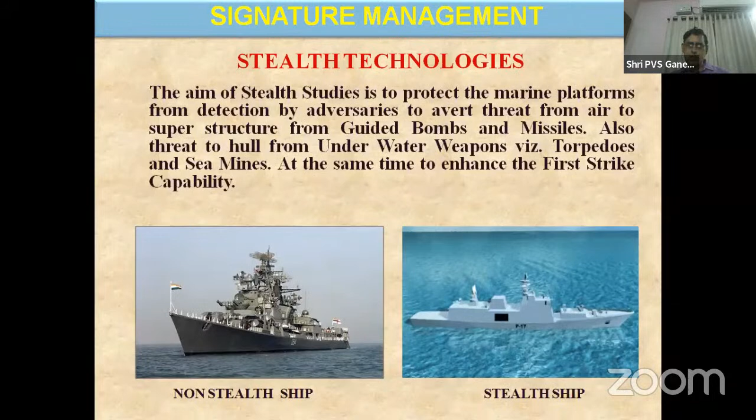In general, when we say stealth technology, we are saying a military tactic, trying to conceal our presence from the enemy. How do we do that? By what is known as signature management. In other words, whoever is able to have the first look will be able to have the first shot, and therefore will be able to have the first kill. That is the principle on which signature management works. If you're able to manage signature very well for ships and submarines, you will be able to do the first look, first shot, and first kill, and that is the aim of the entire signature management.

Here I put two words, Trojan horse and chameleon. Many of you have heard about the Trojan horse, an example from the Trojan War, where the Greeks built a big Trojan horse in which soldiers were hidden inside, and they kept the Trojan horse outside the Troy fort. Troy thought the Greeks had left the fort, celebrated as if they got victory, and took the Trojan horse inside their city. Suddenly from the Trojan horse, in the night, the Greek soldiers came out and invaded the complete city. This is an example of how stealth can function. It's basically a stealthy operation where soldiers were concealed inside a horse and deceived the Troys in the war.

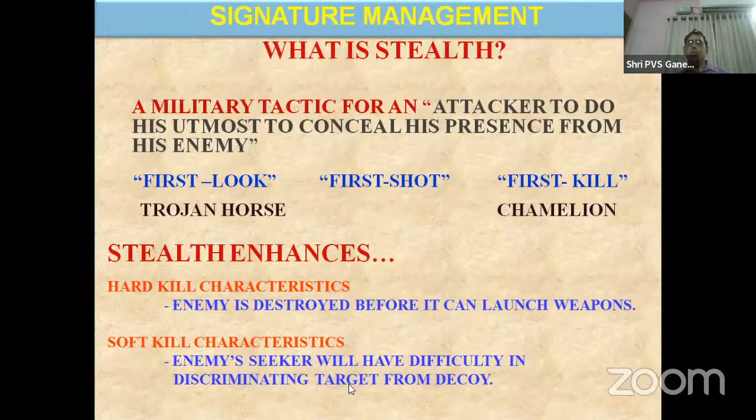Having heard the general philosophy of what stealth is, we look at the spectrum of signatures which we have to control for a typical naval platform like a ship. Here you can see there are multiple signatures that we have to manage.

For example, you are talking of infrared signature, radar cross section, laser cross section, acoustic airborne noise, underwater noise, magnetics, underwater electric potential or extremely low frequency emissions, and hydrodynamic wake. These are the various signatures which we have to conceal or manage so that when emitted from the platform, they are not visible or sensed by the sensors of enemy weapons, targets, or vessels.

Now coming to this particular topic today, though I have shown a lot of spectrum, if I go back you can see the previous one again. You can see a lot of spectra here, a lot of signatures here.

Out of all these signatures, as Admiral Shrivastava mentioned, acoustics is one area where a lot of emphasis is now made, that we should suppress the noise and vibration of the platform to ensure that sonars and mines do not detect our platform. It's a very critical signature, and therefore this gets a lot of importance.

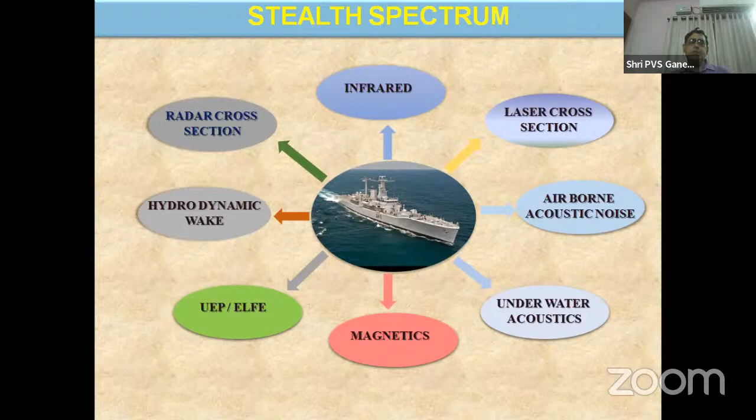How do you manage this? It depends on a lot of techniques that we have to develop. That is the focus of this particular lecture today. So in general, we are talking more about how to control the vibration noise in a marine platform.

When we are talking of noise and vibration to be controlled, we have a concept called source path receiver concept. This is the starting point in noise control. Source is basically, for example, an engine on a ship. It generates vibration, transmits the vibration through its surrounding structure, and then through the hull it transmits as noise in the sea.

So therefore, the source here we can say is typically a diesel engine or a gas turbine or any such auxiliary engines etc. So many engines on board the ship become a source of vibration and noise.

Similarly, a propeller is a source, because when it churns it generates a lot of both vibration as well as noise. In a similar way, there is another source called flow. When the ship moves in water, all around the ship you have turbulence generated due to the movement, and that generates what is known as turbulent boundary layer noise. This flow noise also can be sensed by the sensors from a distance, therefore it is one of the components.

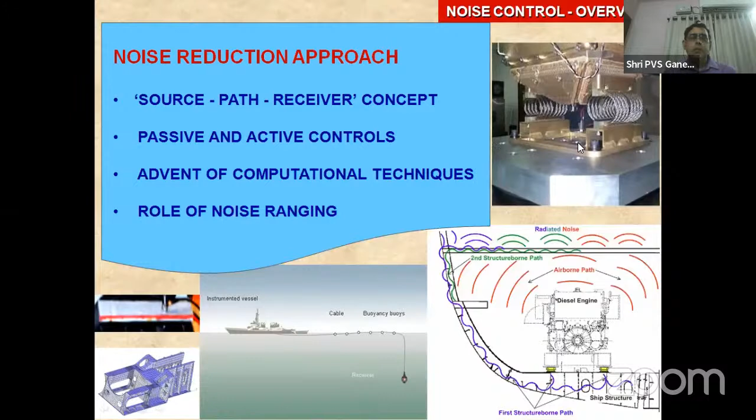These are various ship quieting technologies which are basically implemented practically in many installations. Though it's not an exhaustive list, it's more of a representative list of various techniques available to reduce vibration noise on board marine platforms. Some are internal to hull, some are external to hull.

Internal to hull, as I said initially, suppressing noise at the source level is the ideal thing, which is why low noise machinery is always the priority. If we are not able to do low noise machinery, we come to other aspects like applied damping, for example constrained layer damping or what is known as free layer damping, and vibration isolation systems. Nowadays we are using even two-stage mounting systems and raft mountings, which are more advanced than the single-stage vibration isolation conventionally used.

We also have structural modifications that are possible, like a foundation can be modified to create more impedance mismatch, and typically material changes also. For example, instead of metal, if you use composites, the damping is much better in some applications. We have adopted this as well.

We have flexible bellows and compensators for piping, silencers and mufflers for intakes and exhausts of various engines, whether turbines or diesel engines, and acoustic enclosures, hoods and barriers to suppress airborne noise. We also have detuners, which suppress tonal vibrations or tonal noise components. Various forms of detuners are available, for example tuned mass dampers or tuned viscous dampers, and so on.

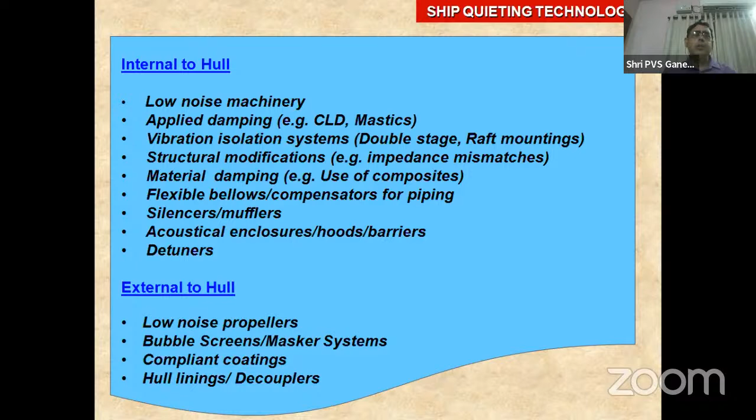Now coming to the next slide, as I mentioned in the beginning, any signature management effort, if it is retrospective, is not going to be the best. Definitely it will be ideal if you are able to implement this at the design stage itself. So it is that much more important that signature management should be an integral part of the overall design spiral.

Coming to only the acoustic design spiral, I call this the acoustic design spiral, where from the conceptual design stage of the platform, you start with your own prediction model of the acoustic or noise model, and then compare with noise limiting curves.

If you are satisfied, you go ahead to the preliminary design level, and then again estimate the noise levels. Probably at this stage you may need to do some model experiments to correlate with your estimations, then analyze and evaluate those data from estimations and model experiments. If required, you modify and refine the design and complete your preliminary design for the acoustic part.

Then you go to the detailed design part, where you need to identify what are the quieter technologies, like I listed some of the quieter technologies in the previous slide. What quieter technologies need to be implemented in the current design platform can be decided at the detailed design stage, because by the preliminary design stage you know where you are with respect to noise, and where the possible lacuna or deficiency is.

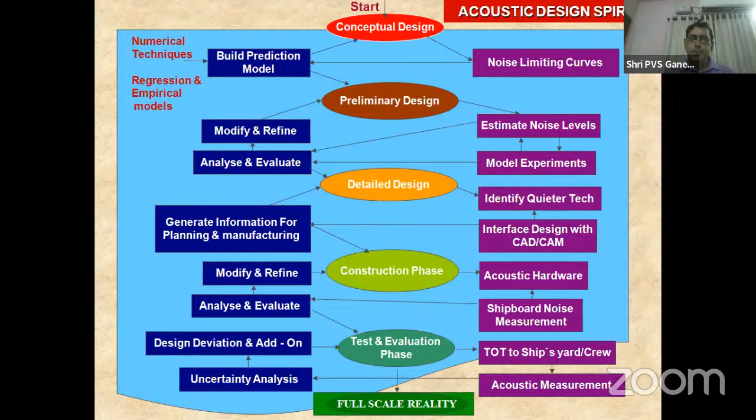Now coming to various kinds of technologies or systems possible to implement in vibration noise control, we have vibration isolation systems, as I already mentioned, which are basically rubber isolators or spring isolators. Various forms of isolators are possible, and they give a lot of improved vibration isolation from the engine to the hull. It reduces the vibration, and naturally lowers the radiated noise signature.

Various forms of isolation are possible. You call it two-stage mounting systems today, because instead of a single-stage vibration isolator, you put two stages of isolators with an intermediate mass - we call it two-stage isolation systems. Similarly, we have raft mounting systems and things like that. I'll come to that in detail in the next slide.

Surface damping treatment is another approach where you can have different kinds of damping applied to the hull and structures. This reduces vibration transmission, particularly in resonance zones, and there are various treatments developed - for example, free layer damping treatment and constrained layer damping treatment. Similarly, for airborne noise reduction, we have acoustic enclosures, hoods, silencers and so on, which reduce airborne excitations and improve habitability on board the ship.

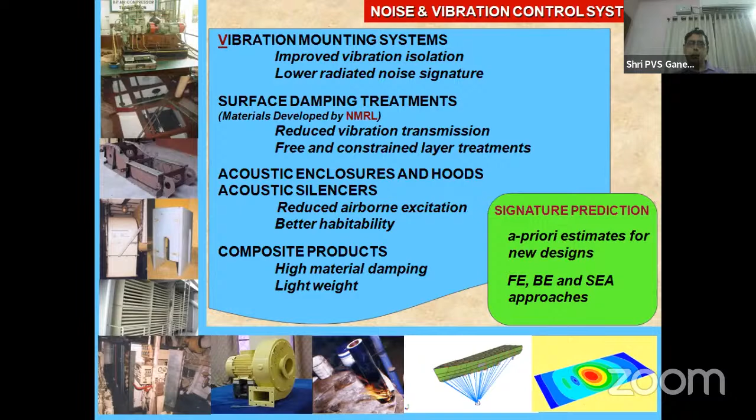So I'll just go through some of what we call vibration isolation controls and noise control systems, which are typically used in the contemporary stealth platforms.

For example, two-stage mounting system is one of the very popular approaches used to reduce vibration to a high level of dB reduction. If you are getting say 15 dB reduction with a single stage vibration isolation, you will be able to achieve almost 25 to 30 dB reduction with the help of a two-stage vibration system. It is not just because of doubling the isolation; it is about the way it is designed. You can see here there are two stages of vibration isolators - one isolator here, another isolator here, and an intermediate structure which is a metallic structure. So this intermediate mass also plays a very critical role, other than the two stages of isolators, in determining the overall performance of the two-stage vibration isolation system.

In addition, because it is increasing the height of the installation, we need to take care of the roll and pitch, and therefore there are some things called limiters which are placed on both sides to ensure that it doesn't sway too much because of the increased height. So we call it as limiters.

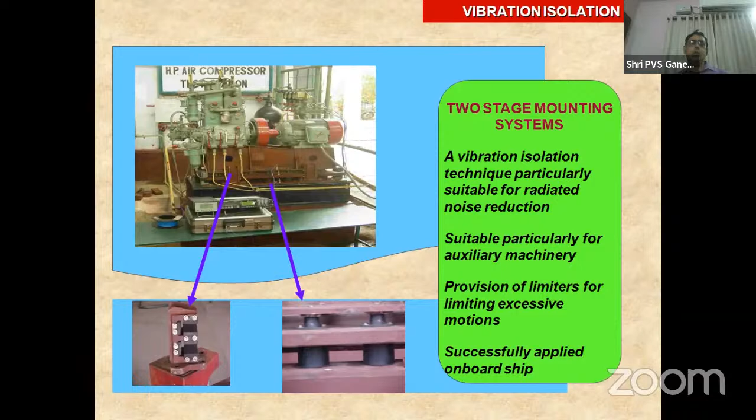These have actually already been tried and successfully applied by us on board ship, and it is being adopted now in almost all newer platforms, all new design platforms.

Similar is the case with the constrained layer and free layer damping treatments, another approach where you can reduce the vibrations by adding what is known as viscoelastic material. The viscoelastic material typically used is various types of rubbers, whether it is butyl rubber or neoprene or nitrile rubber and so on. Various kinds of rubbers are available based on the environmental requirements as well as the performance. We have to choose appropriate materials.

NMRL being our own sister lab, we take a lot of help from them in choosing the appropriate composition and identifying the material. Then we test them at the laboratory using our own methods, in say floating barge or a foundation structure. For example, this is a foundation structure, and this is a floating barge in which we applied say a typical mastic treatment and tested for vibration noise.

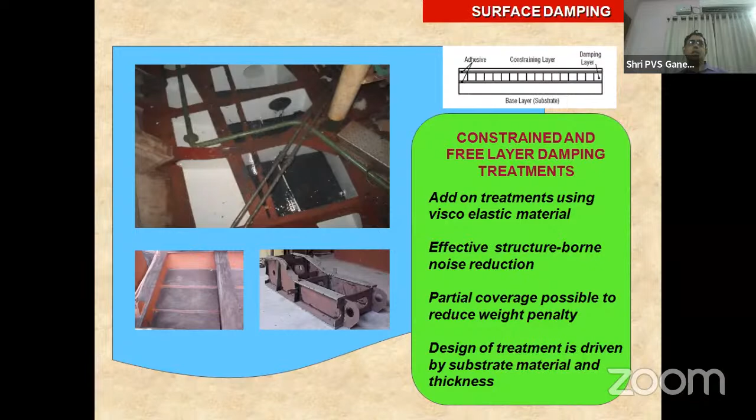So there are various viscoelastic materials tried, and we came out with various compositions, and even partial coverage is possible to reduce the weight penalty while ensuring we get the vibration isolation to the level of satisfaction. This is another successful technique being implemented in various installations on board marine platforms for vibration noise reduction.

Here is another example of what is known as airborne noise reduction method - an acoustic enclosure or hood, wherein you enclose the complete engine with what is known as barriers. The barrier materials are made of perforated panels, with one solid panel outside and a perforated panel inside, and in between it is filled with the sound absorbing material.

The sound absorbing material could be a kind of glass wool, could be mineral wool or rock wool and so on. There are various types of materials we have evaluated and found different, based on the requirement of performance for different frequencies - we can tune the kind of material accordingly to make a panel out of that.

These panels can be assembled to make what is known as an acoustic enclosure. Similarly, for smaller equipment, we call it an acoustic hood. You can see one here - this is a typical acoustic hood for one of the pumps, whereas this is a complete enclosure for a diesel alternator.

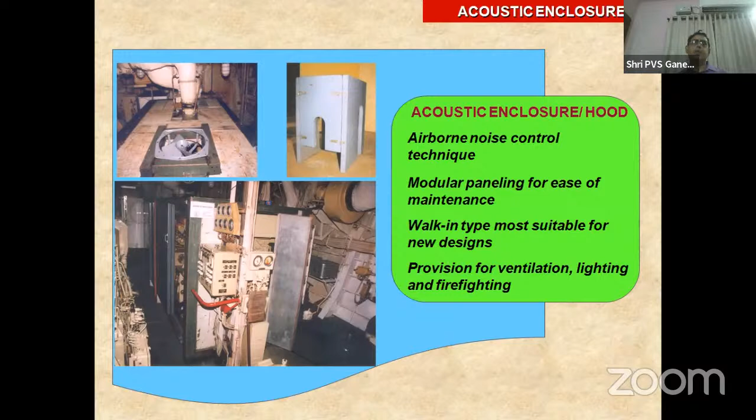Typically we can design all of them at a very early design stage of the engine room itself, so that the space constraint with respect to applications will not be a problem in actual implementation. In newer designs, we are creating enough space at the design stage so that these enclosures and hoods can be catered for. For example, a walk-in type design enclosure is a very important design for a gas turbine, and these are already being implemented.

Another application for airborne noise reduction is the silencer. Here we call it a dissipative silencer, because various types of silencers are available in the literature, whether reactive silencers or dissipative silencers and so on. Typically what you see in automotives is a reactive silencer, which depends more on geometric changes in the construction. Whereas in a dissipative silencer, we look at the principle known as baffled silencing.

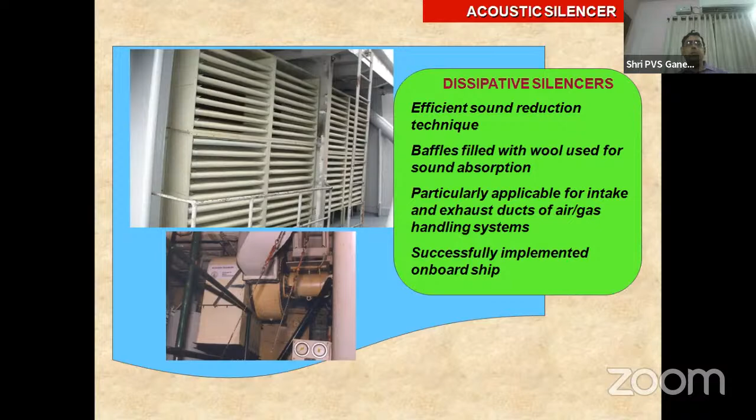Baffles are panels filled with wool, and these baffles are made of a casing material, typically GI material, galvanized iron. In case you don't want any maintenance issues, you can even use FRP composites for the casings, and then fill it up with the typical wool. The thickness of the baffles has to be designed so that we get efficiency in terms of sound reduction. At the same time, it should allow the mass flow required for intake or exhaust. These are successfully implemented and used in all ships and various marine platforms.

Another point is about composites for vibration noise reduction, where you use fiber reinforced plastic for control of vibration and noise. Here you can see some examples - one typical foundation structure or a blower casing is fully made of FRP, or even a pipe. Composite pipes are made and used onboard some ships - one of the ships we have actually implemented this.

Similarly, even a complete shafting can be made of composite shaft. These are some typical examples where the inherent properties of composites, primarily the damping property, can be made use of in reducing vibrations and noise on a typical marine platform. Therefore there are various possible applications for this, and some we could practically demonstrate.

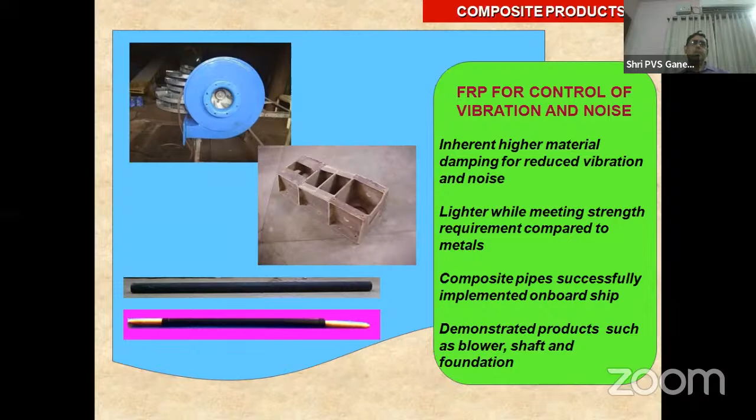For prediction, as I mentioned, FEA, BEA, and SEA - finite element, boundary element, or statistical energy analysis - combined with CFD will really provide excellent tools for noise prediction today. There are even commercially off-the-shelf software now available to predict the noise. They are very suitable at the design stage itself, so you can play with the parameters to check the ideal way of treating the platform for reducing underwater noise.

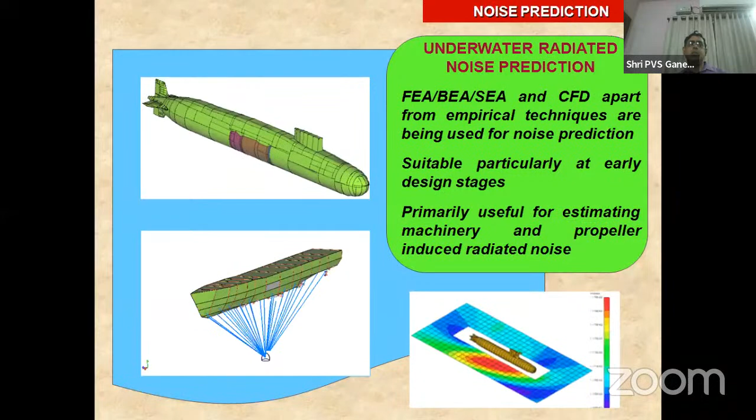Therefore it is being used now in our newer designs always. This is typically some of the plots showing how a complete submarine or ship can be modeled, and noise can be estimated for the complete platform.

There is another important technique coming up for measurement or vulnerability assessment - acoustic vulnerability assessment - the acoustic holography technique, which is very important today to assess the vulnerability of a platform from a noise point of view. Even an engine can be assessed for its noise pattern. The advantage here is you can get a 3D image of the complete noise pattern of whatever object you are measuring, so it becomes much easier to identify the hotspot and effectively control the source of noise. This is becoming a very critical technique now.

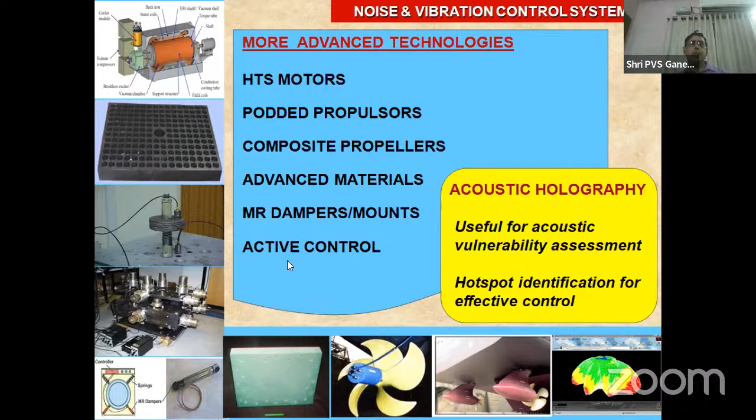Coming quickly on to the various topics that I listed just in the previous slide.

The advantage with this kind of propulsion, the HTS motor, is a big reduction in noise signature. At the same time, the size will be much smaller compared to conventional motors, and electrical performance is extremely fantastic, almost 98% as the literature says. You can see the relative sizes here. Conventionally, say 36.5 megawatt is typically like this, but for the same thing it will become almost one-fourth in an HTS motor. So this is a big attraction: the size, the lower noise, weight reduction, the inherently quieter machine with high efficiency. All kinds of advantages that it offers are really the major attraction.

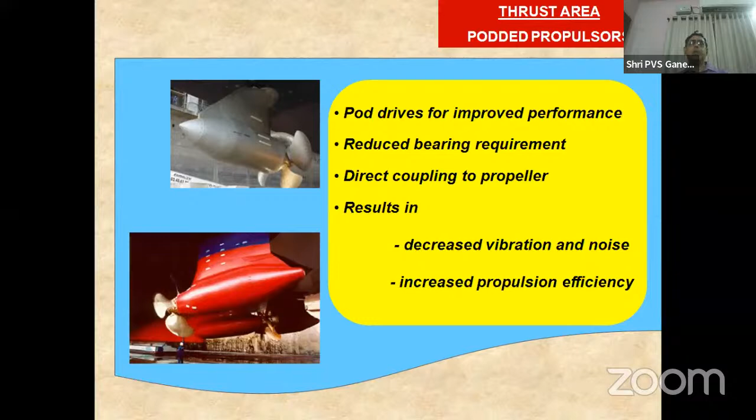Coming to composite propellers, they are realizable, and we have already done this for some of our applications. They offer increased damping, at the same time lesser weight penalty. Obviously maintenance is much easier because there is no corrosion. They are improved, shock and fatigue resistant, and are well proven now.

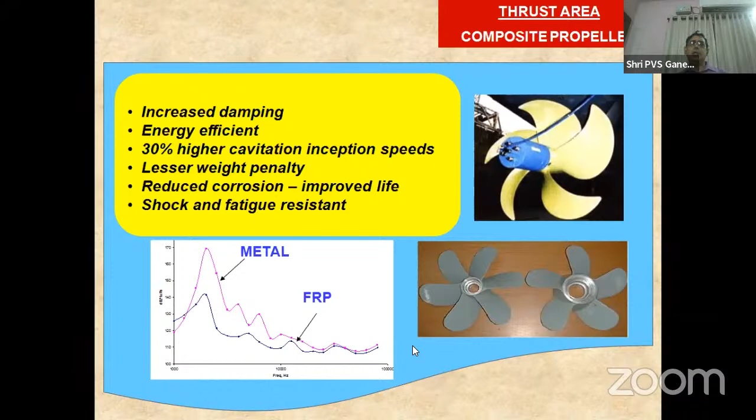You see the typical metal versus FRP noise level curves here. FRP shows much lower noise level, particularly from medium to high frequencies. These are two typical composite propellers realized in our laboratory for a typical application.

And there are other materials, as I said, honeycomb sandwich panels, which are also being tried by various laboratories, because these are now going to be used for hull construction also in future, and they are going to be highly noise reducing structures.

Tiles I already talked of, like anechoic tiles and decoupling tiles, which are already being done by NMRL for various applications, including submarines. But ideally I would like to have anechoic and decoupling tiles together in one tile, known as a magic tile, a combination tile, where you try to meet the requirement of reduction of noise from the platform, while also trying to reduce the echo coming from the outside sonar. If you are able to achieve both objectives in one tile, that would be a wonderful tile. This is where we are now trying to lead NMRL to develop. Individually, both kinds of tiles are already developed and proven, so we are looking forward to the magic tile for the future. They reduce self noise and also help in reducing the radiated noise signature.

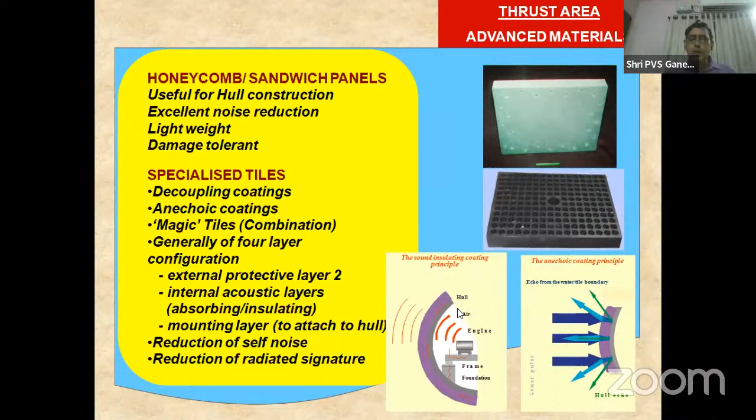I already talked of tuned mass dampers. Though it is realized to some extent, further work is required because we have to optimize the way it is being developed. Detuners can be one of the approaches, a tuned mass damper. The idea is to reduce the tonal vibration coming from any particular engine, pump, or auxiliary equipment. If any particular equipment is giving a typical single frequency tone as a dominant tone, then ideally this kind of tuned mass damper or tuned viscous damper can help in reducing the tonal vibration.

You can see the typical reduction that you get. Without the TMD, you got this much peak, whereas when it is implemented, it has almost become flat. So this is a very, very effective tool or technique for reducing the tonal vibrations.

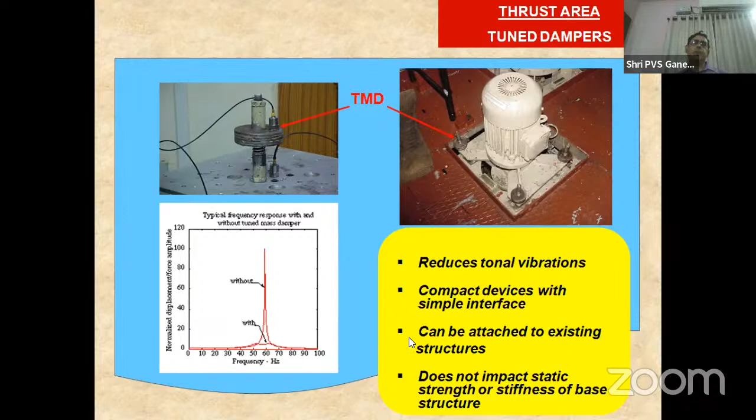At the same time, it can be easily retrofitted. That is one of the advantages with tuned mass damper, because it is fitted to the foundation, and therefore it is not going to affect the other construction of the engine, etc. So it can be attached to the existing structure. That is a major advantage of tuned mass damper, but it is only primarily for reducing what is known as tonal vibrations.

Talking of MR dampers or mounts, magnetorheological - it's basically a concept where you are trying to suspend some kind of magnetic particle, like tiny iron particles, in a carrier liquid, typically mineral oil. When this is implemented as a damper, the viscous properties of it get changed rapidly due to the vibrations impinging on them, thereby giving a signal which can be controlled to reduce the primary vibration.

So this is based on what is known as a feedback circuit. A typical active control combination is also there - it is not just a passive method. It's basically a combination of passive and active, and therefore we call it a semi-active technique. It was already implemented in one of the realizations, and gradually it is being improved towards ruggedization to ensure that it can be implemented on actual platforms in a much easier way than the current way of implementing.

But as a technique, it has already been proven that it provides very good low frequency control of vibration and noise. So far, whatever passive techniques I talked of, most of them are very, very effective at medium to high frequency. MR mounts and things like that are basically active control - they are very, very suitable for low frequency control. In fact, one of the areas where nowadays a lot of questions keep coming to me is how to control low frequency vibration. This is one of the ways to do that.

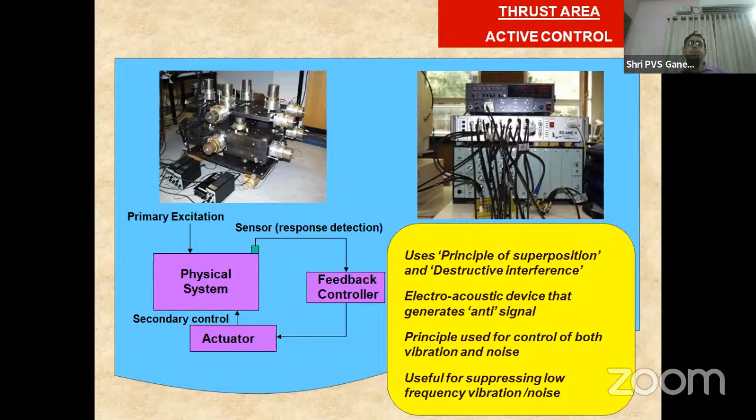Basically, we are now having other methods - so far I talked of only the methods to control, and I also talked about the predictions, etc. There is also a testing method that is always required at the laboratory.

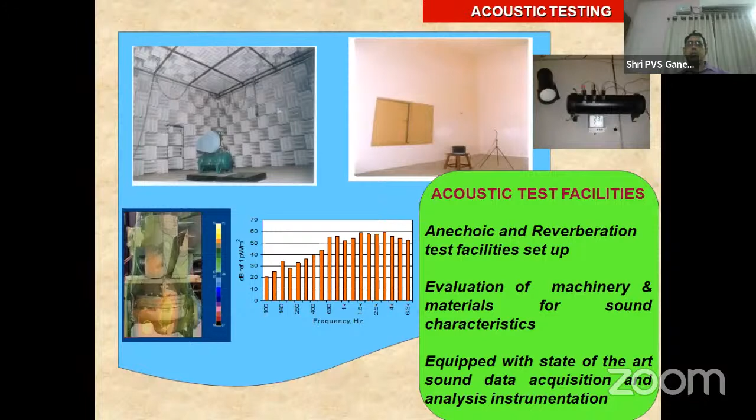These are some of the test facilities required to do the testing whenever you develop certain material or certain technique - you need to test them at the laboratory, and acoustic test facilities are some of them which can be used. For example, anechoic and reverberation chambers available at NSTL can be used to test various materials or techniques developed, for their efficacy. So this is typically one of the examples.

Similarly, when we are talking about vibration, again we need some test facilities to check, for example, the mount, whether the vibration isolator is giving the required performance or not.

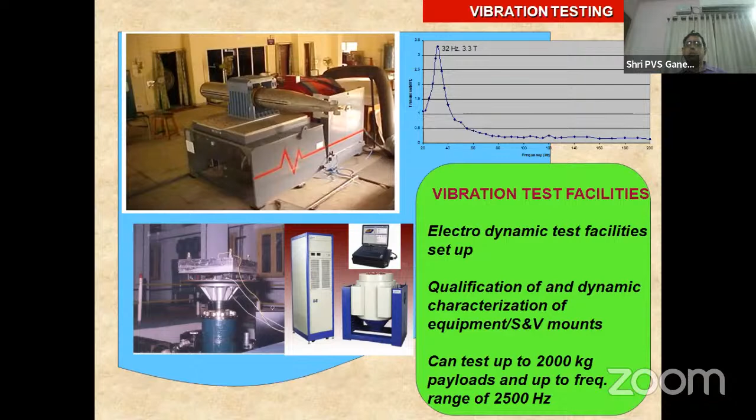You can easily check by putting it on a vibration shaker with the required mass on the mounts, and then check its performance - how much vibration isolation it is giving, what is the dynamic deflection, what is its dynamic stiffness, and many other parameters can be checked using what are known as vibration test facilities, which we have even at NSTL.

There is another technique sometimes used on board or in field situations where I need to know the natural frequency of a particular component. I can use what is known as modal testing, which means trying to extract the natural modes of an object. There are various methods by which modal testing can be done. One is the vibration exciter shown in the previous slide - modal exciters can be used.

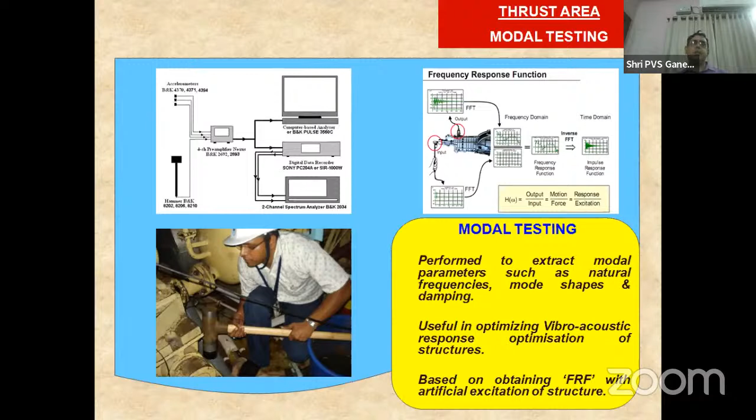In addition to this, as I mentioned in the first slide, we have a requirement for a range to really know what noise is being generated by a typical marine platform, for which we need a kind of sensor array along with data acquisition systems to acquire the data and then analyze it to know the kind of noise spectrum being generated.

There are various ways of doing this. One is a permanent range setup, which we typically set up at sea at certain depths. We can have a range permanently set up, wherein sensors are laid on the seabed and connected through a fiber optic cable to the shore, where we can acquire the data. This is a typical setup used for a permanent range setup.

On the other hand, we also have a provision to do a portable range setup, where you can carry portable range instrumentation for certain depths - up to certain depths you can measure this. And for deep noise ranging, for example measuring a submarine's noise, probably both the permanent range setup or portable range setup may not be feasible easily.

Whereas we have a mobile range setup - mobile acoustic range setup, what we call MARS setup - which can be deployed to measure submarine noise at a very deep depth also, for example at 150 meters depth, you can measure the submarine noise.

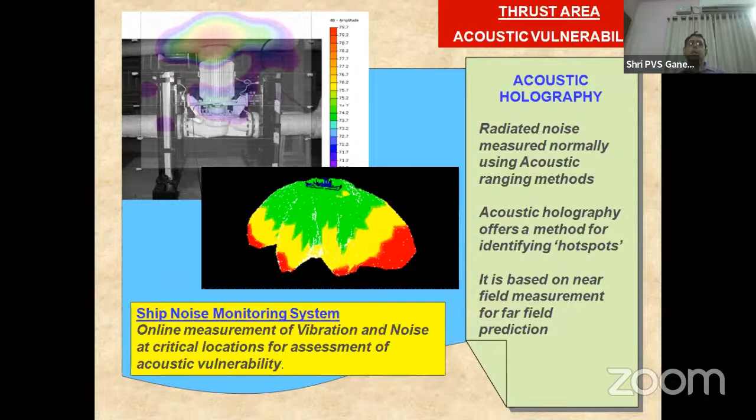Put a kind of green, yellow, red system where even the operator can see whether vibration noise is well within control. If there is any alarm, he will immediately alert the higher-ups to look into the details. So this typical noise monitoring system could be quite useful, and I think some of the ships already have got this.

So with this brief on today's vibration noise techniques as well as upcoming techniques in marine platforms, I want to say that to master noise and vibration technologies, we need techniques to predict noise radiation. We should also identify the major sources at the design stage itself and accordingly attempt or design quieter technologies relevant for controlling those major sources. So the development of vibration noise control techniques becomes that important.

And then finally assess the vulnerability using acoustic holography techniques. Acoustic vulnerability assessment can be done after implementing all this. As I showed in one of the slides in the design spiral, if you follow that design spiral technique at each stage, assessment of acoustic vulnerability becomes much more practicable.

By doing all this, you will be able to do signature management from the noise and vibration aspect very effectively. You should always look at the changing requirements as per the world scenario and state of the art requirements, and accordingly overall tactical signature management has to be attempted. We cannot be fixed on what is to be followed at any particular time. You need to adapt yourself, keep improving your techniques to ensure that you are on par or slightly better than what is being tried out by others.

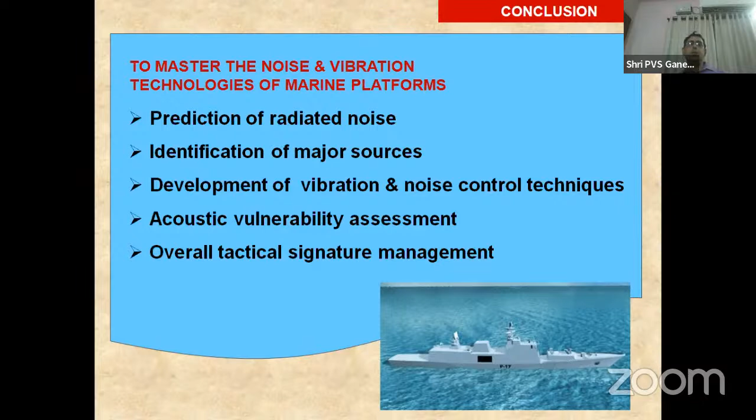So with these words, I'd like to conclude, and I should thank the organizers for giving me an opportunity to share my thoughts on noise and vibration control applied to marine platforms.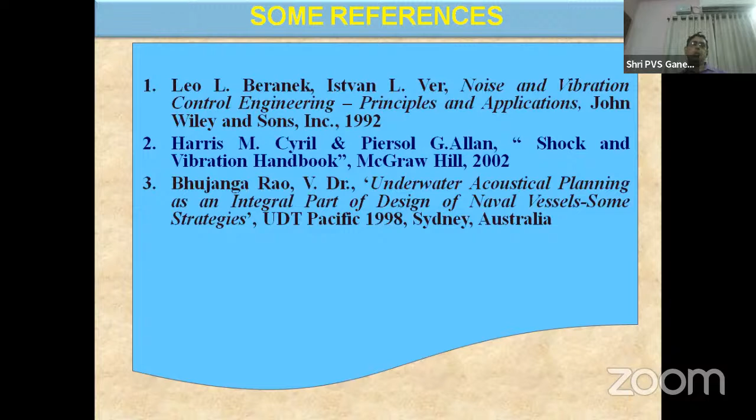And of course, there are many other reports that we have generated over the years, which I have referred to in the slides. I didn't put that as a reference, but there are many technical reports generated by NSTL. Because of the classified nature, I didn't put most of the results. I only put the techniques but not the actual results, to avoid sharing any classified data.

With this, I'd like to thank once again the organizers for giving me an opportunity to share my thoughts on this particular topic. Thank you very much.

Can I go ahead with the question and answer session?

Well contained and comprehensive overview of what is the state of the art today, both in the country and I think generally globally.

We can do one thing. We can take on the questions first, and then maybe a little more discussion. There are some things maybe I could also add. Yeah, sure, with your permission. Yes, no, definitely, why not? Or maybe I'll just still speak about those things so that maybe some questions can emanate from that also, perhaps. Sure. There was one question which seems to have gone off from the question answer box.

That was about hull-induced vibrations affecting machinery. I think that was the intent of the question, that is how I understood it. I think you had mentioned already that. Yeah, one is, I think, just for the participant who was asking that question, you may like to answer that. Yeah, in your presentation, it was there about vibration resistance, but I think perhaps we could clarify that.